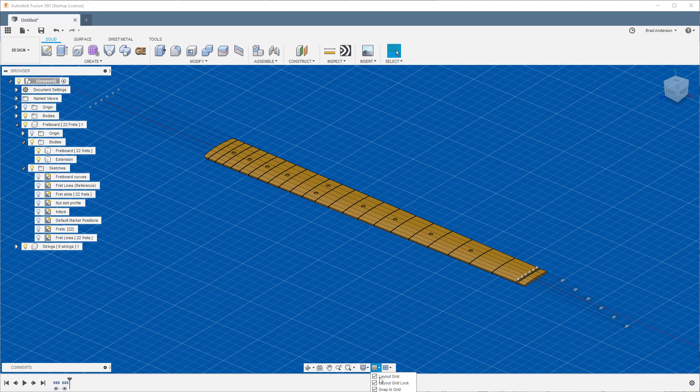So for myself, I personally like working without the layout grid on. I feel like it clutters the screen and it's just distracting.

Let's go ahead and turn the strings off. We're not going to need those immediately. The extension I have no use for right now, so let's turn that off.

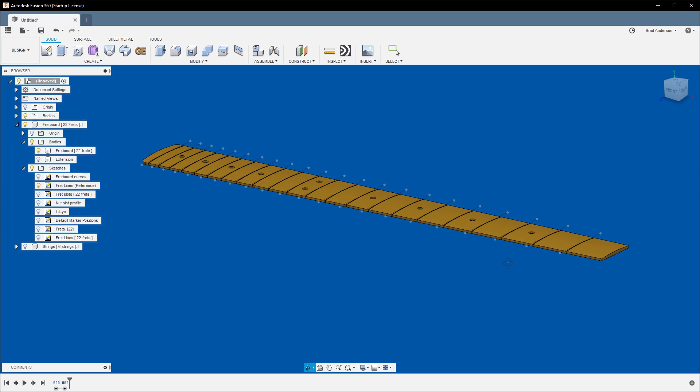Let's go back to earlier, I said that the fret lines reference were going to be important. Let's turn those back on. And let's make sure we activate this component for the fretboard, that way any bodies or sketches we make will be included within this component.

So let's go to the bottom side and select this bottom face. We're going to go to the split face tool up here in the solid toolbar. Yeah, we got the faces to split. Let's select this first fret. You'll see that big red ring that's going to cut all the way through. Hit OK. Now you see you have two different faces down here.

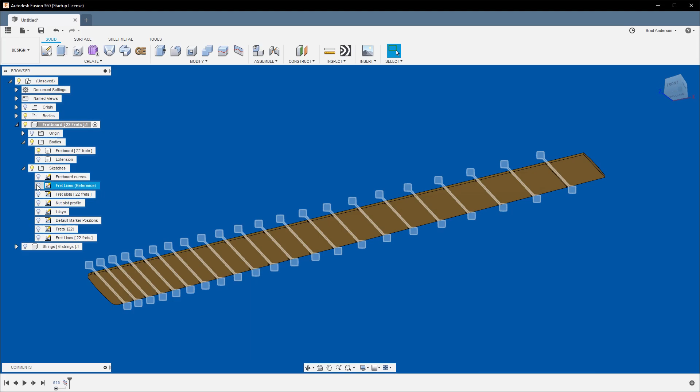Let's do the same thing for the 12th fret. Let's turn this back on, and let's go ahead and turn the fret markers on. I know this is the 12th fret because I have the gap between these two frets as well as these two frets. Again, split face, select 12th fret.

All right, we can turn that back off. We can turn this back off.

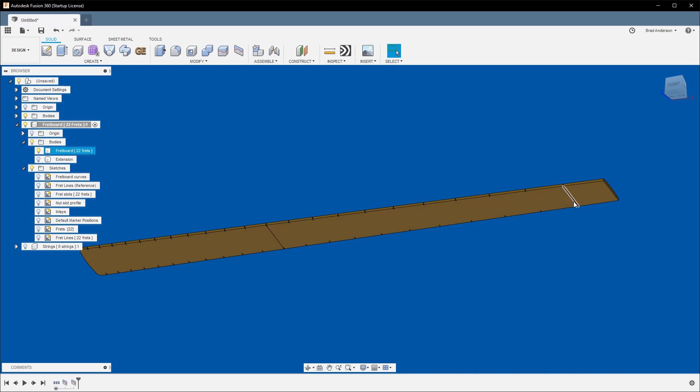You'll notice on a lot of websites when you look at guitar necks, specifically electric guitar necks, they give you the profile for the neck, and typically they list the 1st fret and the 12th fret. What you'll realize is most of the time the 1st fret is when you start to taper in and transition into the headstock. Same with the 12th fret, that's when you start to transition into the heel. So this chunk right here is usually going to be your most straight part of the guitar neck.

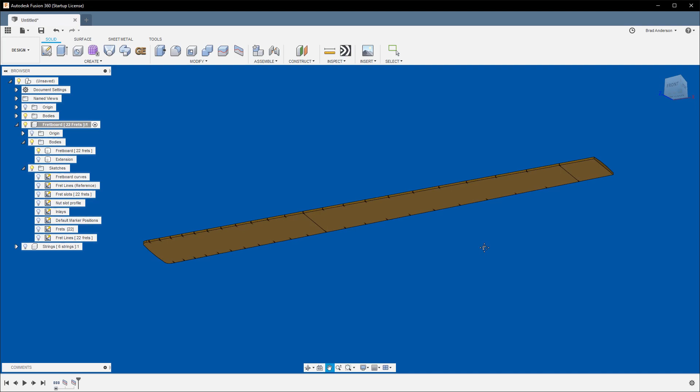So let's select this face as well as this face, and we're going to hit the E button for an extrusion. If you look at the distance or the direction of the arrow, we're going to hit 1, and that's going to give us 1 inch.

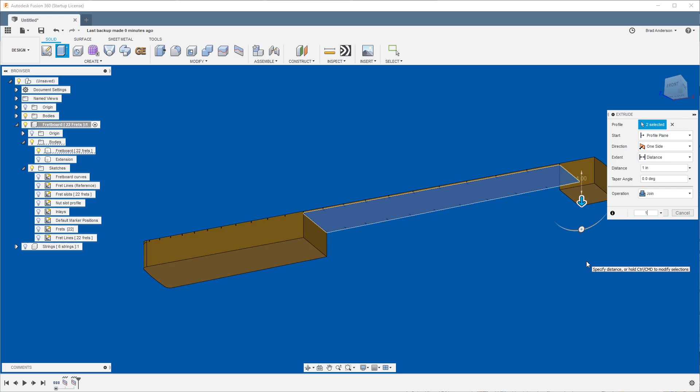But when we created the fretboard, I selected a height of an 1/8 of an inch, and I want the overall thickness of the fretboard, or thickness of the guitar neck, to be 1 inch. So let's go ahead and take that distance back out of it. So 1 inch minus 1/8 of an inch, and hit enter. Now you see we have an extrusion of 0.875 inches for an overall height of 1 inch.

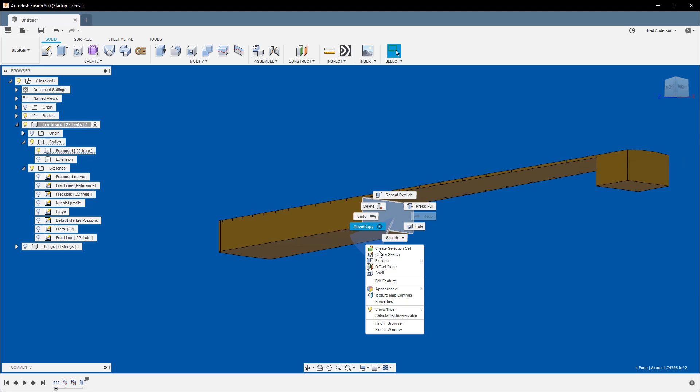Alright, so let's go ahead and click this face, right click it, and hit sketch, create sketch. What that's going to do is create a sketch plane on that face, which is going to be handy so when we draw a curve we can apply the handles and apply constraints to it easily. So I have it up here, the fit point spline.

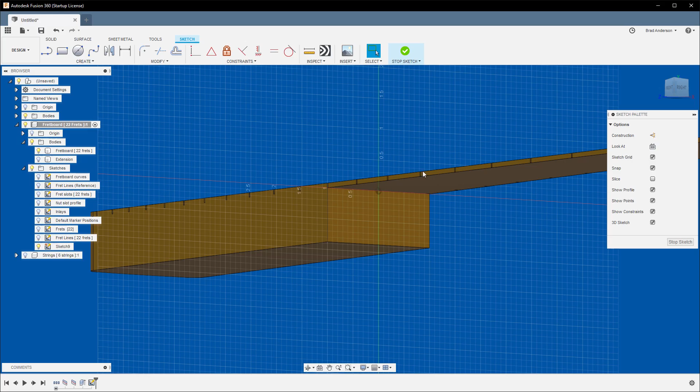If you don't, go down to your spline under create and hit fit point spline. If you want to add that to your toolbar, select these 3 buttons or these 3 little dots and hit pin to toolbar. So what we want to do is get a nice under view of everything.

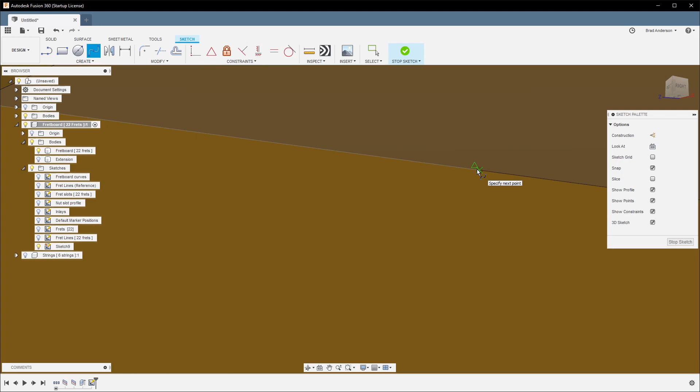We can actually turn the snap grid off, we're not going to need it. Hit fit spline. Let's select, since this distance is really close, you want to make sure you're actually hitting this inside interior corner. We're going to go to this midpoint, you're going to notice it's a midpoint because you get that green triangle or delta. And then you're going to go to this end, you're going to know it's going to snap.

You're going to kind of feel it snap, and then you're going to get that green square. Hit enter. All right, you'll notice that the spline's green.

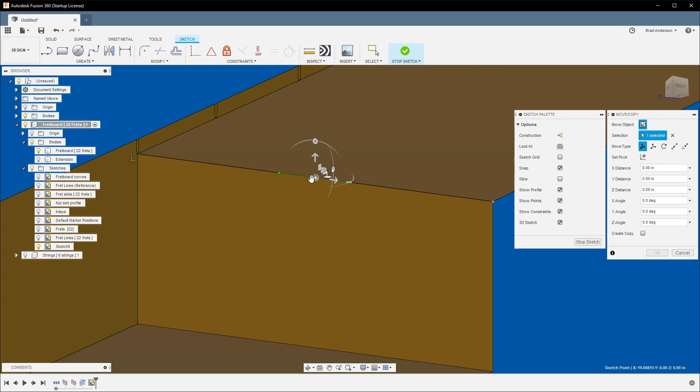So we want to delete any coincidence, and then we want to delete that. And then let's right click and move on the center point. When you selected the right one, you'll see your tangent hand or your spline handles here. Let's move this down.

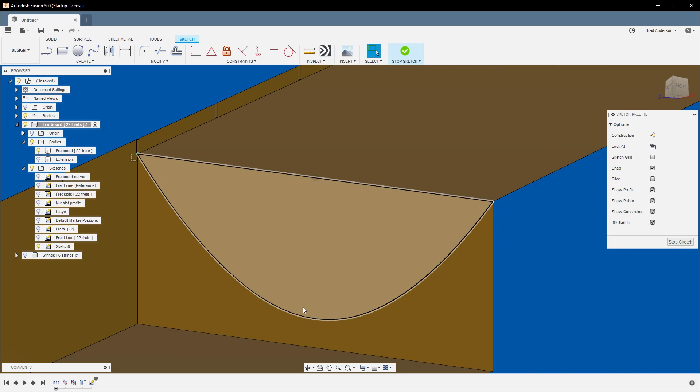Negative 0.85. Again, we want to add the distance back that we applied to the fretboard earlier, so that's going to be 1.25 plus. That means from this point to the top of the curve is going to be your true 0.85 inches. And then let's select the curve and go up here to your constraints.

Select this handle. What we want to do is use this horizontal and vertical constraint. What that's going to do is either favor going up and down or side to side, whatever it's leaning more toward.

And let's do that for all three of our handles. So now you know this is curving straight up, this is curving straight up. This is almost the same as using a tangent handle because this is straight. And then you'll notice that this handle and this handle aren't the same length, which means this curve's not going to be equal.

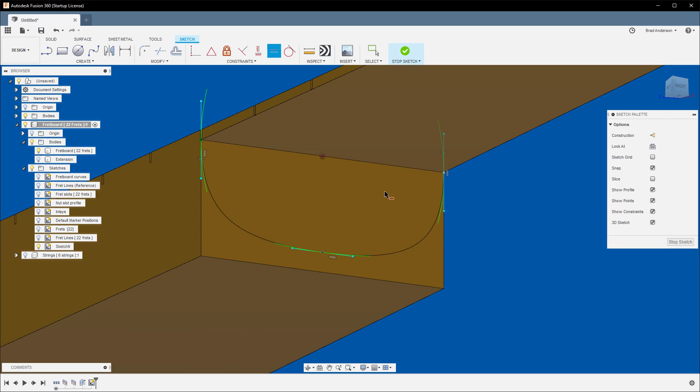So let's go ahead and click the small handle and then the large handle. And now you'll see that they're now even. You hit enter. Are they even?

All right, so that was wrong. Let's go back and level that guy out. I think what's going on is these coincidences can really get annoying when you don't want them. So let's try that again.

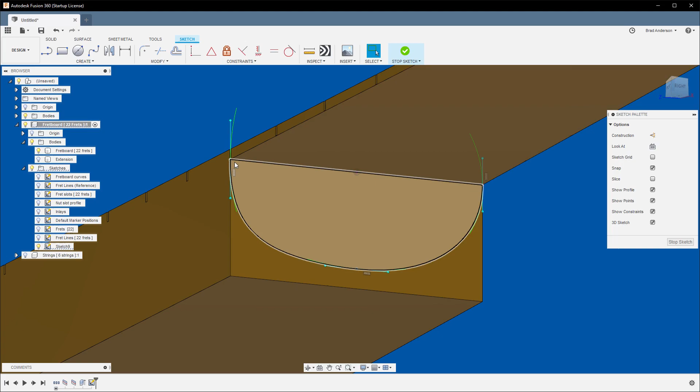So if you ever feel like your spline isn't behaving the way you want it to, you either click your spline point or your actual curve and just delete the coincidences. And then let's go and try the equal constraint again, selecting the small one first and then the large one. All right, so now they're both small. You got a nice even curve there.

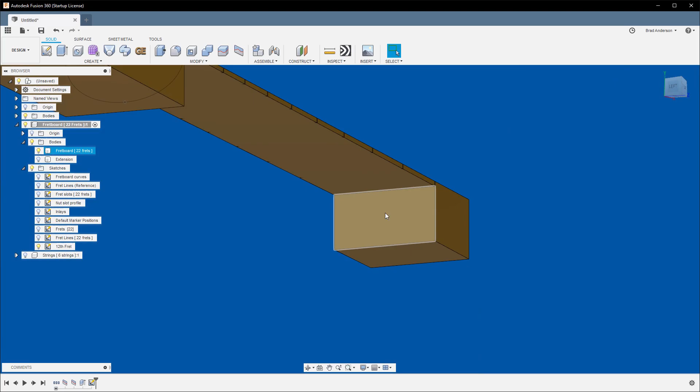We'll hit stop sketch. Let's go over here and let's name this sketch, and we'll do the same thing over here. Select that face, which is at the 12th fret position, and we'll hit create sketch.

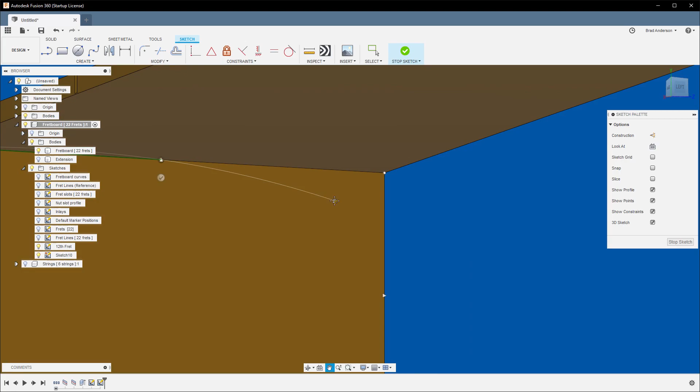Again, we're gonna want a nice underneath view. Let's get that fit point spline. Same thing, make sure we get that interior corner to the midpoint to the opposite interior corner. Hit enter. Again, it's green, so let's go ahead and delete the coincident.

Let's delete this. And let's move this down. For the first fret, we want the profile to be, instead of 0.85, we want it at 0.8. So negative 0.8, again adding back the material of the fretboard, plus 1/8 of an inch.

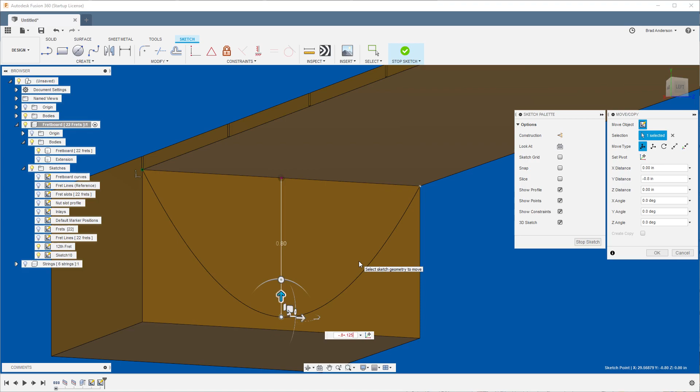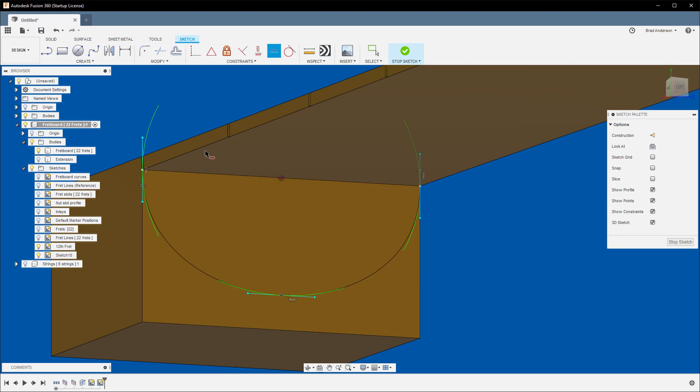And then same thing again, select the spline, delete any coincident. Let's go up here to your horizontal and vertical constraint and select all three. Again, let's make them equal. Hit enter. Stop sketch. And this is our first fret.

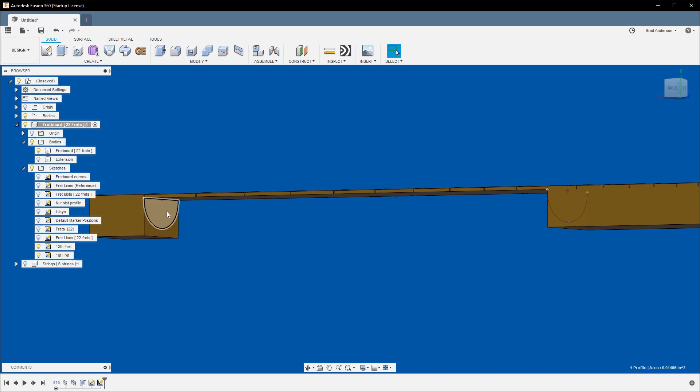Now, since our two fret sketches are on actual bodies, if we select it, we can get their profile here. And because of this, we can use the solids workspace to do a loft. And if you loft between the two, let's do operation new body. So now we have the actual straight part of our neck between the 1st and the 12th fret.

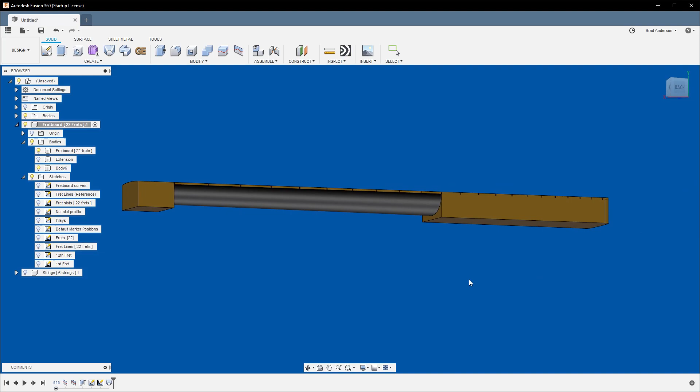And if you hit the A, this is just personal preference. Again, I hate this silver material. Let's go down to, I prefer this white wax. It's light, it's easy to see, gives a nice highlight. And this is just temporary.

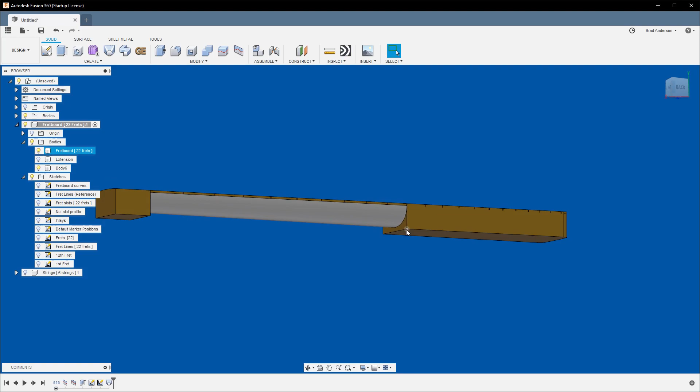So let's go to this 12th fret position and select this face and hit Q. And what we're going to do is we're going to offset this back, maybe.

Face, Q. All right. And if you look at a guitar neck, you'll notice that the transition for the heel starts around the 12th fret and it ends kind of between the 15th and the 16th. So we'll try negative 3.125. This is really kind of personal preference depending on how deep you're going to have this in your actual body or where you want this transition to start or end. To me, this just seems like a good spot, looks pretty common.

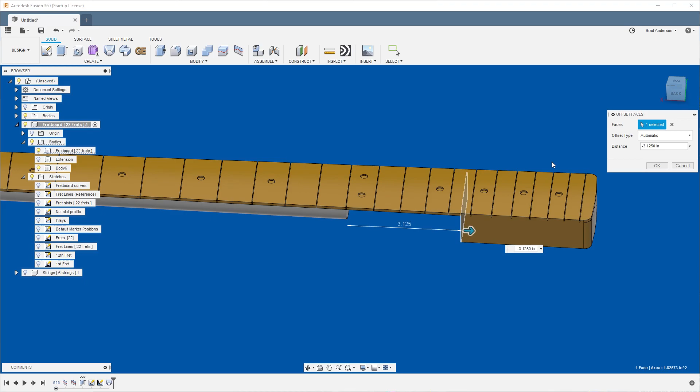Hit enter, and now we have the space for our transition. So what we want to do as well is let's go ahead and get this guy out of the way. Let's push him back about... oh, too much. Let's just go about 1 inch.

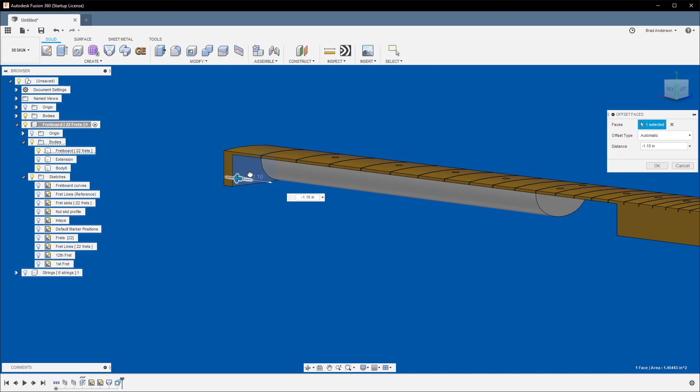Now let's go back to Solids, Combine. We're going to combine this, the fretboard with our neck. Join. All right. So now this is all one body.

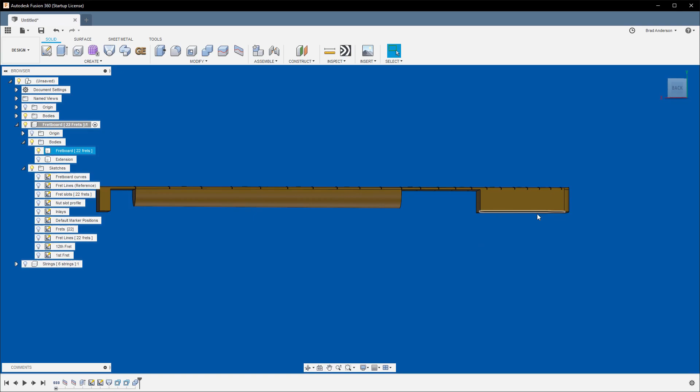And let's go to our Surface tab, and let's delete all these interior faces. Now you can see inside the actual model. And what we want to do here is we want to select this face, again create a sketch on that plane.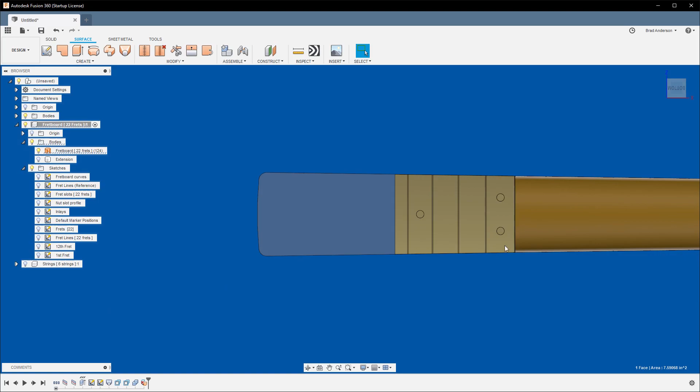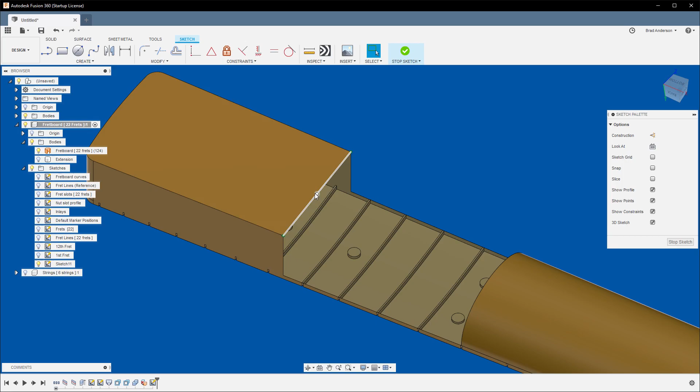And very much like we did the 2 frets, let's create a spline with the edge point, the center point, and the opposing edge point. And what we're going to do is create a nice round surface area for the transition from the body to the neck.

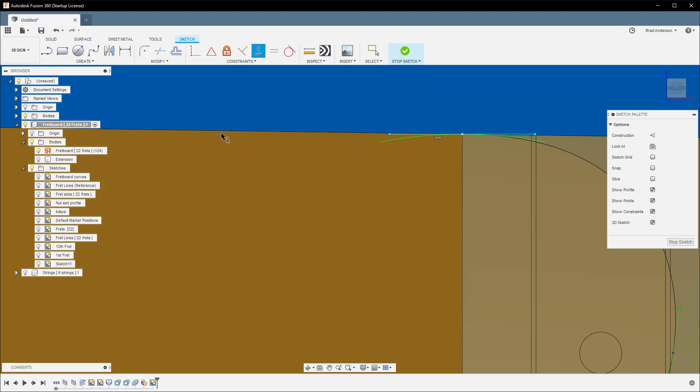So let's move this about an inch out. Select, enter. Again, let's select the curve, delete any coincidences. And this time for the tangent handles, since if you look at the bottom, this isn't straight, if we were to do horizontal vertical, you would see that this doesn't match up because this is actually at a taper. So let's undo that.

And what we want to do is let's add tangency. And what tangency does is it ensures a smooth transition between 2 surfaces or 2 splines. So it just calculates what this, let's see, takes that handle.

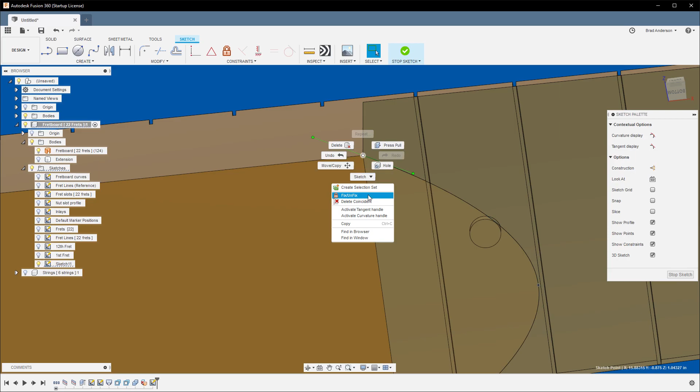Okay, if it's not working, delete coincidence. All right, let's try this again. Well, this is embarrassing. There we go. There's 1, 2. All right.

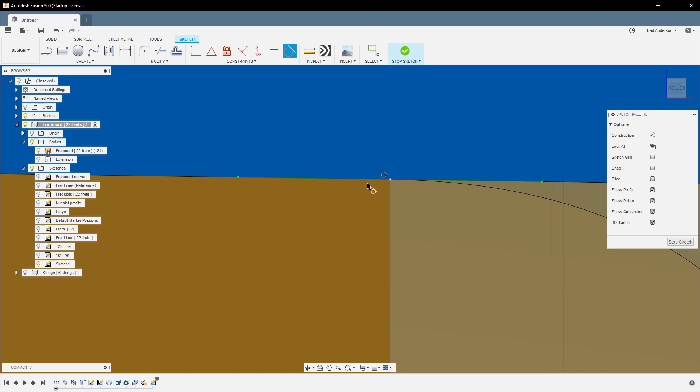Now if we zoom in again, you'll see that your handle is now in line with the body. And then let's go ahead and make this one horizontal and vertical just for safety. All right, nice and straight.

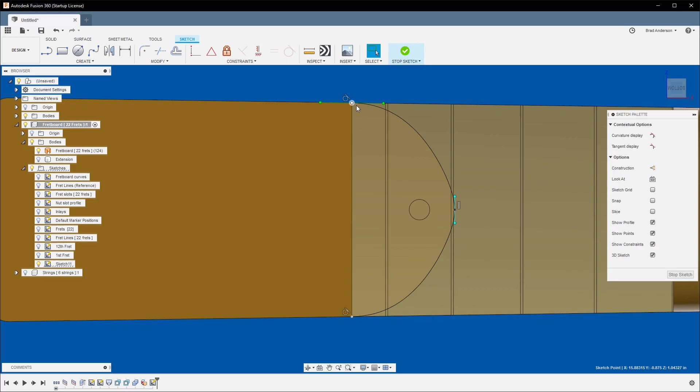Hit enter. And for this, let's give this a nice little point by dragging that handle in. So right click it, hit move copy, and do the same for the other side.

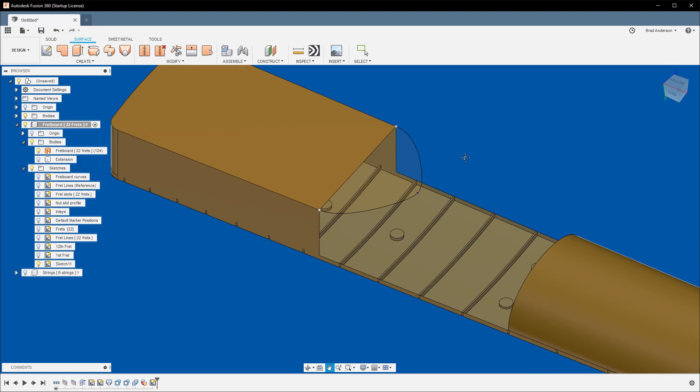And what that does is that's just going to give this not such a standard boring curve. It's going to give us kind of a little point. And then let's go ahead and select and highlight this profile face, hit patch, and hit enter.

And now that curve is now a patched face, and we're going to add that by stitching. We're going to add this to this. And now you see that line's gone, which means this is all one face.

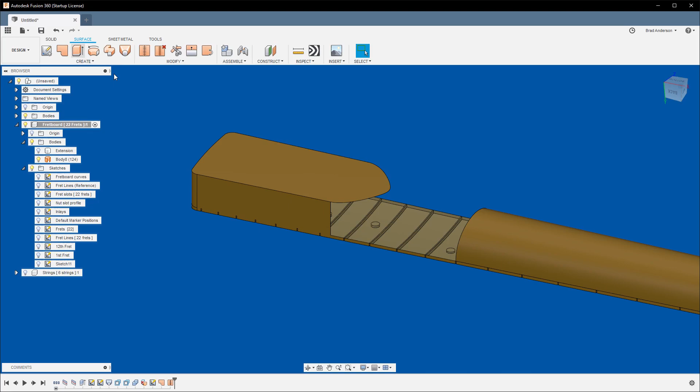Now let's see. All right, so now we got to somehow fill this with that. Easy - those strings from earlier, let's turn those back on. You can see them here.

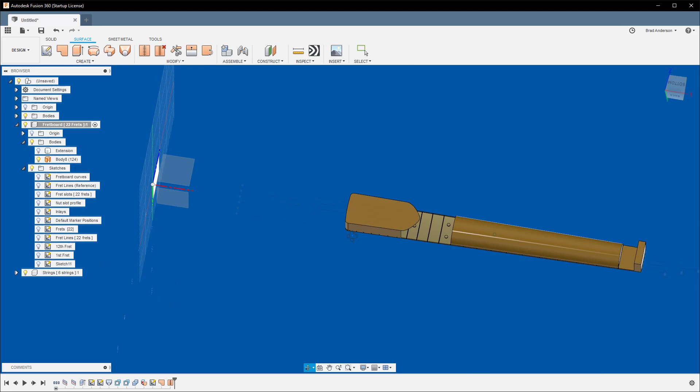Now what we want to do is create a sketch. And what we want to do is create a sketch on the plane we want to project against, as if you were to drop noodles on the ground. If that makes sense - probably not.

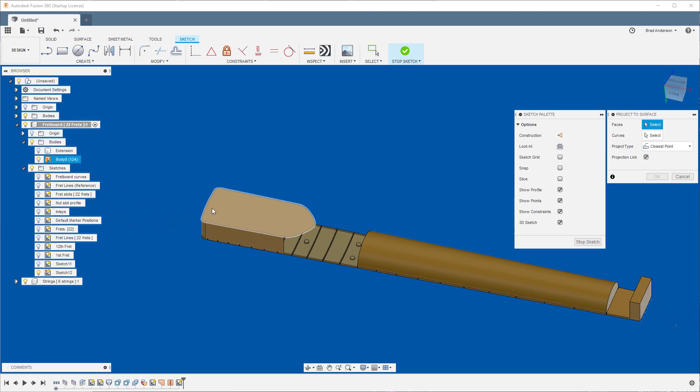All right, so now that we've created a sketch, we're inside the sketch. Let's go to Create, Project Include, Project to Surface. And what we want to do is project these lines on top of your neck and then your heel. Let's select the curves. And then we don't want a projection link.

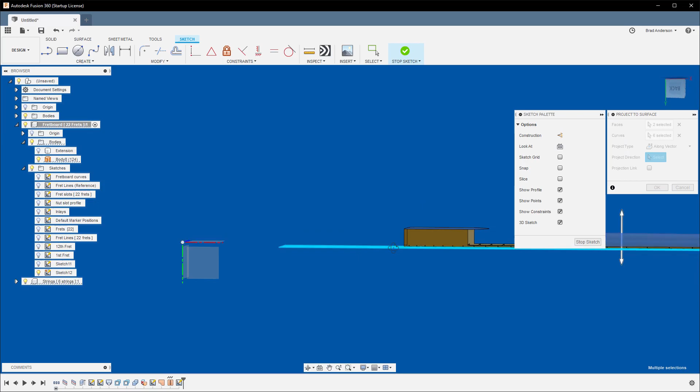We want these to be independent sketches on their own. And then we want the project type along vector. And what that means is it's going to project straight down onto those 2 surfaces.

So we'll select this bottom plane again, and you'll see how you have these red equidistant lines projecting straight, which is exactly what we want. So hit OK, and let's hit Stop Sketch.

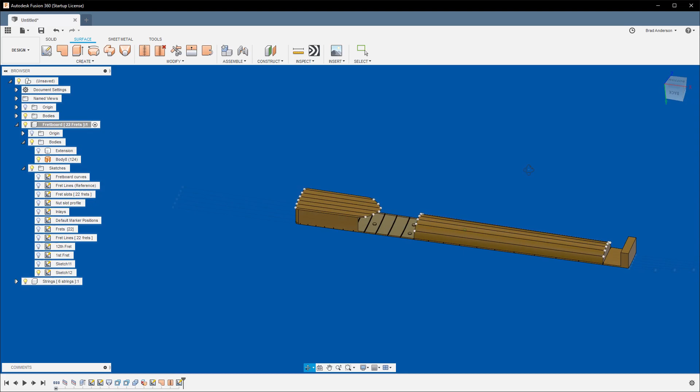Actually, let's not hit Stop Sketch. Click on this, right click, and let's go back to Edit Sketch.

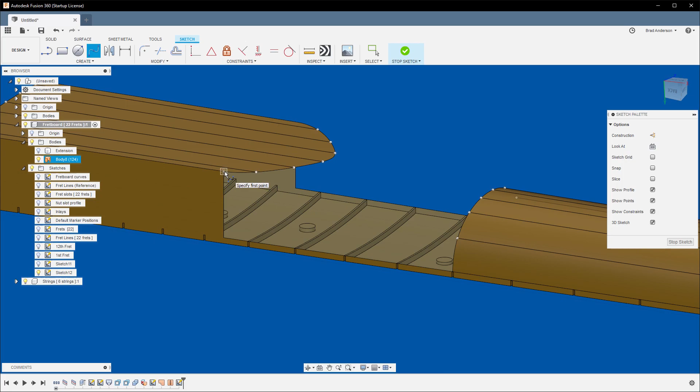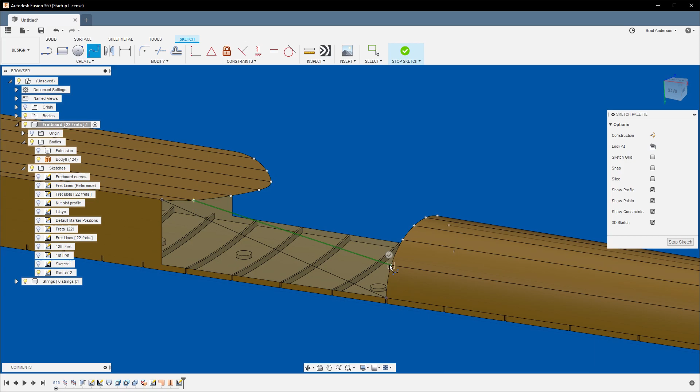So what we want to do now is connect these points with tangent curves again. Let's go back to fit point spline, select it, and start with this interior point. The white square lets you know you're right in that corner. Let's go down to this one, hit enter. If you right click, the top of your marking menu gives you the last tool or function you used. So let's right click, go up to repeat fit spline, connect this point to this point, hit enter, and repeat for each one of these.

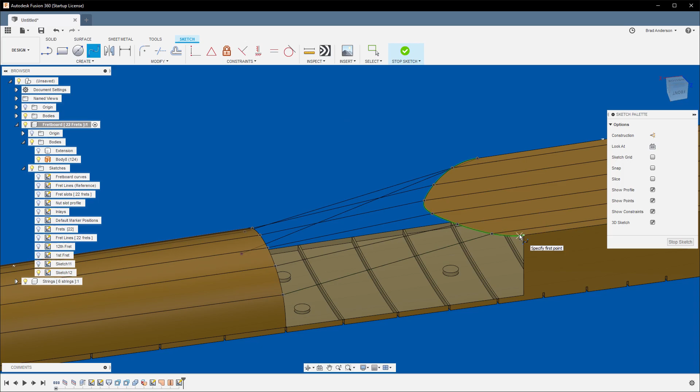Again, make sure you're actually selecting the right corner. All right, so now we have our splines.

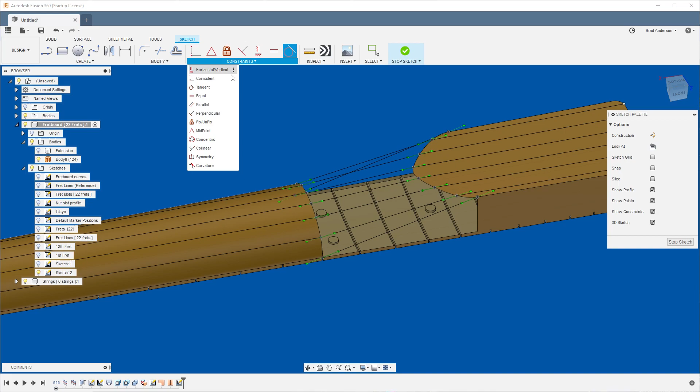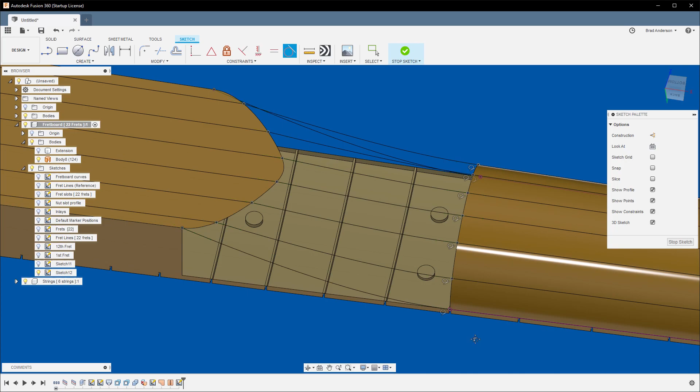Let's go through and make these all tangent with the neck. Go up to your constraints, hit tangent. Again, if this isn't right here, you can find it in your drop-down menu. Then we'll select this line to this line, this line to this line, and so on. You'll know your surfaces and splines are tangent when you get this little icon down here. Hit OK, right click, hit OK, or hit enter. Now we have our curves.

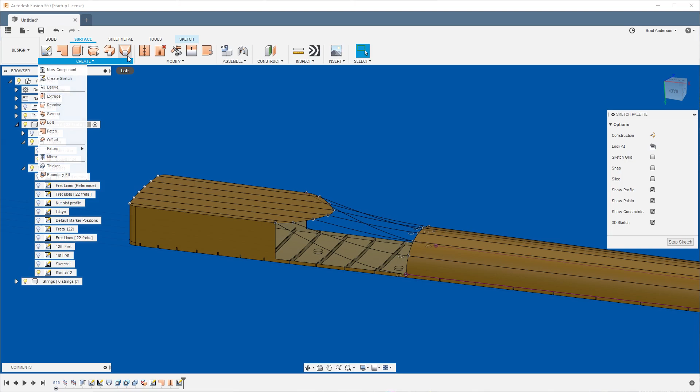What we want to do with these curves is go up to Surface, Create Loft. Mine's up here in my panel. Starting from either end, you want to work end to end. The end you start doesn't matter, but you do need to go from one to the other—you can't just pick this one and then that one and come back. So 1, 2, 3, 4.

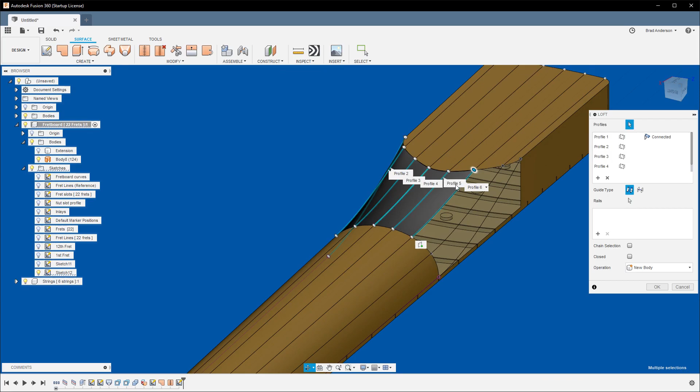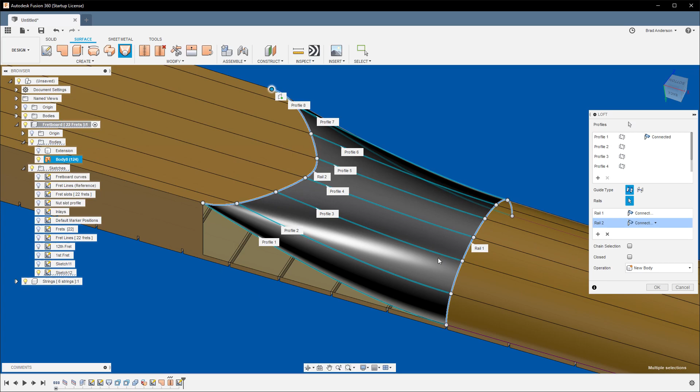All right, so those are our profiles—we have 8 profiles. Now we want to go down to our rails. We're going to select this curve where our 12th fret would be for our rail, then go up here to that surface we made earlier and select that. What that's going to do is fit all of these onto that curve and onto this curve. Let's hit OK.

And then let's go ahead and stitch the neck to this transition. You'll know when it's a green line, that means it's going to be able to weld and properly execute. So hit OK.

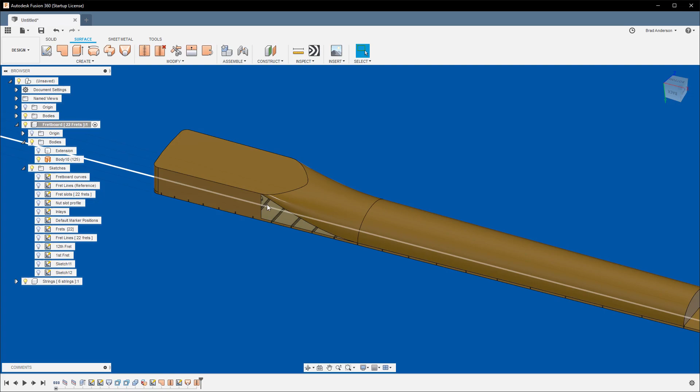And then we have these holes here, and this is a perfect time for a patch. So let's select this interior triangle, hit OK, right click, repeat patch, OK. And then again, let's stitch all these together.

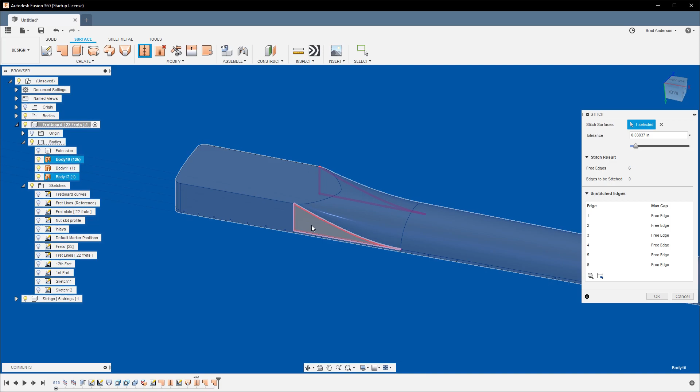Let's turn the strings off. All right, and there you go—this is the heel transition. Let's double check the curvature.

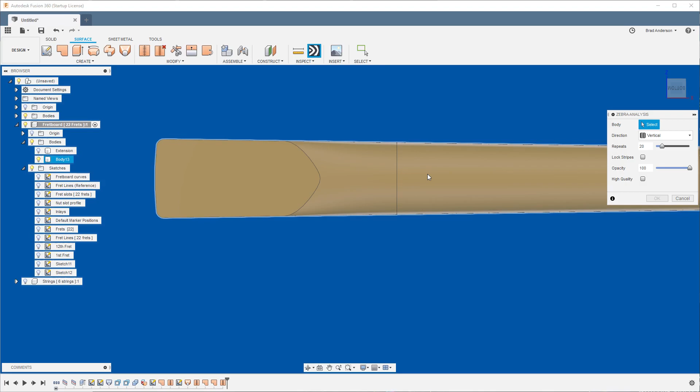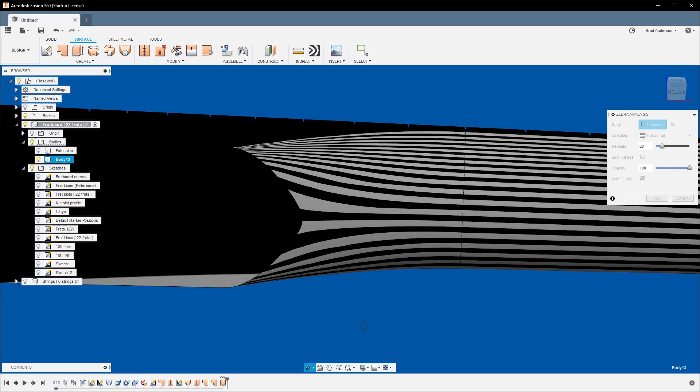If we go up here to Inspect, Zebra Analysis, change this to horizontal and high quality. What you want to see here is all these lines kind of grow away from the center point. If you see these come in here, that means you have a dip, and we don't want that. We want our material to be nice and convex, not concave. If you just kind of tumble around, you'll watch the stripes, and this will show you another view of the surface.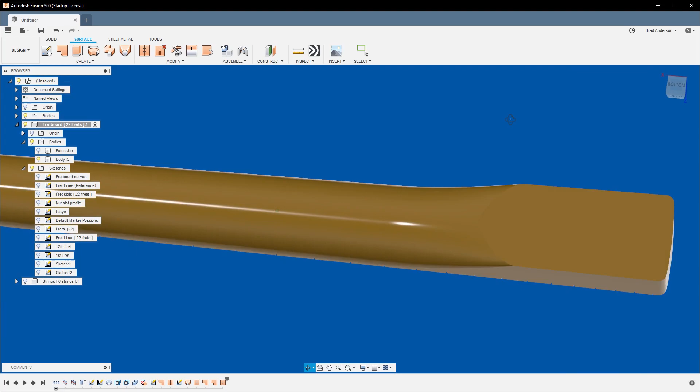Let's hit escape. We can even hit Control 4 to get rid of our line display, and you can kind of tumble around and see the smooth transition. Hit Control 6 to get back to your lines. And that's essentially how to do the rear heel.

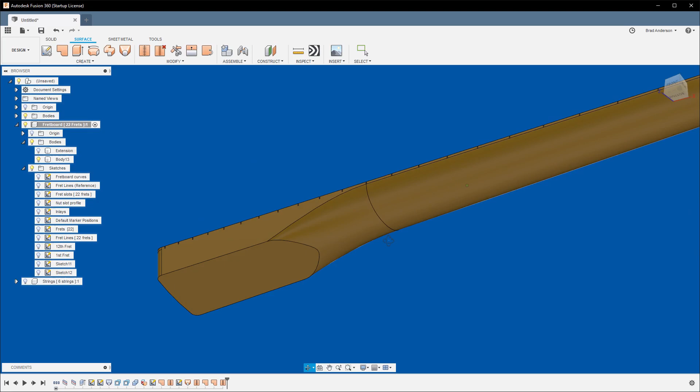Again, this can be easily edited to your own desire depending on the curves you draw, but essentially the process is the same. In the next video, I'm going to show you how to do the neck transition into the headstock, which will be a different approach than this one.

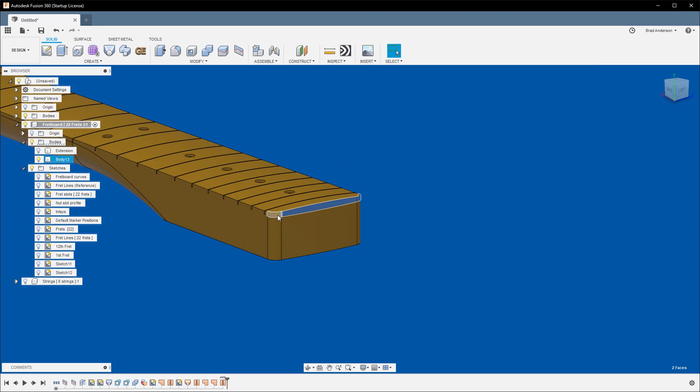And real quick, just to make this pretty, if we go to solid and select these 2 faces—maybe, there we go—hit delete, those will be gone just for aesthetic. All right, see you in the next one.